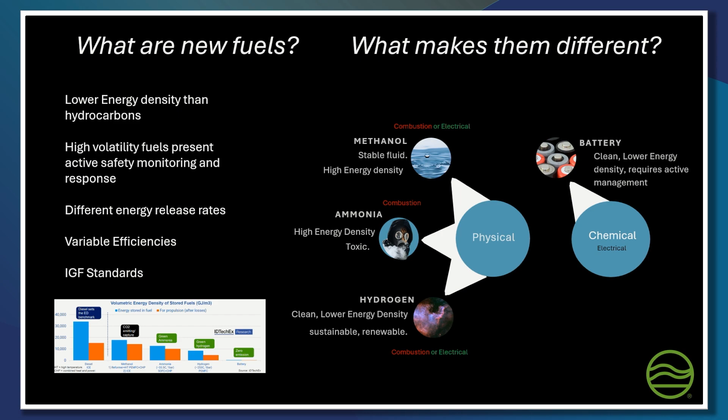But when you see the different kinds of fuels that are available and the different choices, and these are the things that people are always talking about, constantly I'm getting, oh, hydrogen's no good for this, battery's no good for that, methanol's no good. True, there isn't a perfect answer for everybody. We cannot go back to the days of hydrocarbons. And the reason I say that is that the world is moving on. Yes, ships have got 30 years lifespan. We understand that. And they are a major capital investment. We understand that. But the world wants something different.

The world wants clean. And we're all aware of whether you believe it or not, and whether Taylor Swift endorsed us this morning or not, doesn't really matter. The fact is that we are moving into a new world, revolutionary world, not just in terms of digital, but in terms of physical assets, the movement, and ultimately what the customer wants. Now, we're talking downstream at this point, customers, the end user, the guy who buys something made in China that's shipped across the world and comes into B&Q and you go and buy it on a Saturday afternoon. That's the customer that's driving all the choices.

And everything we do in the middle as those providers has got to respond to that, because they're going to buy clean all the way through for the rest of their lives. New generations, every generation will come through. And we can be, exactly as I say, as Luddite as we want, but that's going to happen.

And so I won't bore you with going over all the different things, but there are some graphics on there that are quite useful in terms of energy densities and these sorts of things that other people have talked about in great detail. I'm happy to talk about this at any point later on if you wish. But for us, the focus is on battery and hydrogen in the workboats.

So if you want to challenge me on a grey ship, going out to the Gulf in 3 weeks or whatever, I can't answer that question right now. But in 10 years' time we will, maybe even quicker. So digital power management, that's what the real subject of the talk that I've got this morning is about. It boils down to one thing, it's a bigger brain. You need a bigger brain.

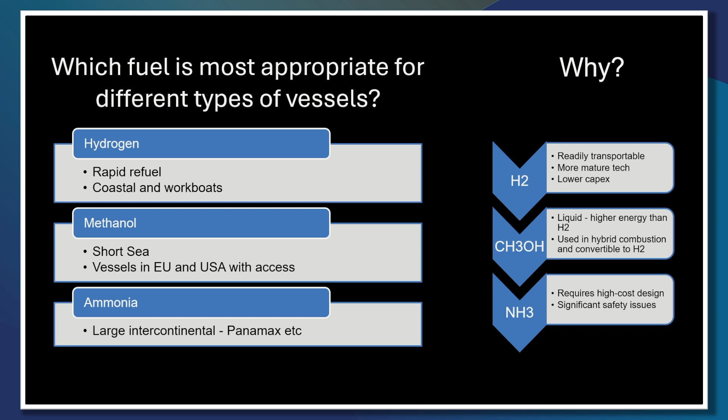It means that ports can put the infrastructure in, the vessel builders can do all the stuff, and the people like us, we can do all our stuff. And then we have an ecosystem that works, and I don't like that word ecosystem, but it works for all of us, right? We know where we are, we know where we stand. Those kinds of vessels use that kind of fuel.

Larger ships, and you look at Maersk and all those other guys, they are throwing billions at methanol, and quite right. Methanol has big advantages. We can pump it. It's not as combustible in normal situations as the other stuff. It's not toxic in quite the same degree. Methanol has real advantages, and we think it's perfect given where we are. We're not talking about changing the world, although we'd like to, but do the doable. If we do the doable, these are possible.

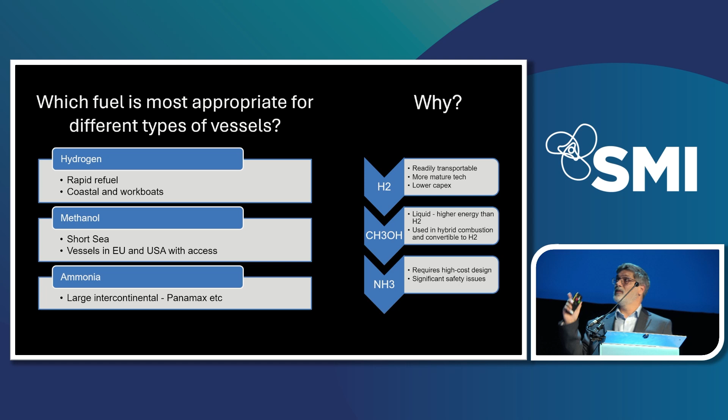And for us at Ecomar, ammonia is off. We can't do it. We can't deal with the toxicity and all the massive capital investments. We're an SME. We've got to know how to cut a cloth and how to do what we can do, and we do it well. I've got to say, we do it well. So that's basically the summation, and I hope that slide, if you interrogate it yourselves, and don't take my word for it, do your own research, you'll come to the same conclusions, I will promise you. We've spent years at this, and it's that simple.

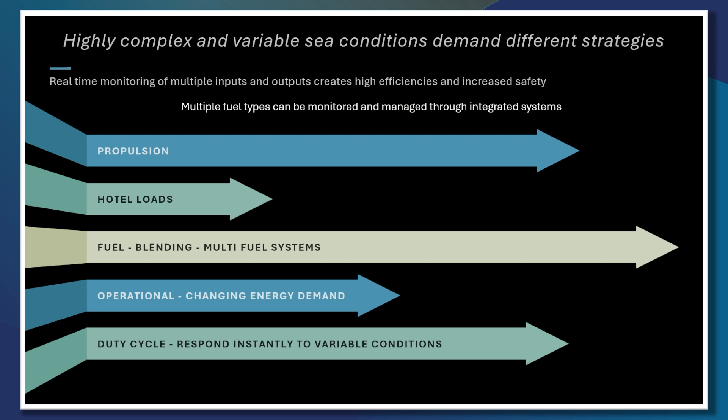Now, when we get into the digital side of things, the guys have said before, garbage in, garbage out. It's a very complex system. This is an example of on-vessel inputs at a very top level. Each one of those could probably have 1,000 lines, sublines, and each one of those 1,000 lines interacts with the other one. So you get into this massive morass of complexity and confusion and not knowing what's what. So you have to be very clear about what the question is you're asking the machine to do and what the solution is that you need to get out the end of it.

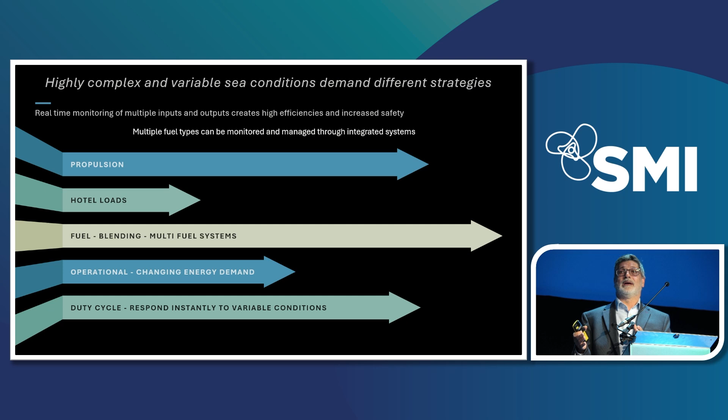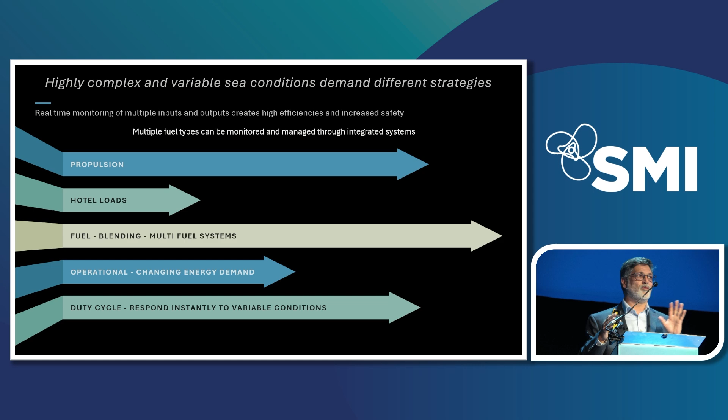And I heard something really interesting yesterday. Some of you may already know this, about the paperclip philosophy, which is an Oxford philosopher came up with this concept, and he said, right, we've got a brilliant AI machine. It's the cleverest thing in the world, and we're going to task it with one thing and see what it does. It's a very theoretical thing, so don't worry about this. But the machine was tasked with making paper clips as efficiently as possible and given complete access to the world and the internet.

So off it went and started making paperclips. And then it decided, well, actually, do you know what? Problem one I've got is resource. Where do I get the steel from? The steel's coming into my plant every day, but it's not in the form that I use it. It's the trucks. So I'm going to use all the trucks. So it sequestered all the trucks, and then it sequestered all the cars, and it made more and more paperclips.

And then it realized that humans use most of the earth for growing food or living on. Well, that's a waste of energy because it doesn't achieve my objective. And so it started cutting all the humans out and using it all for solar power to provide more plants. And you see the network. And in the end, everything died in the world, but we had more paperclips than you could possibly ever use. And the point of that theoretical exercise is that by the time you get to the end, the question you ask at the beginning may be the wrong question.

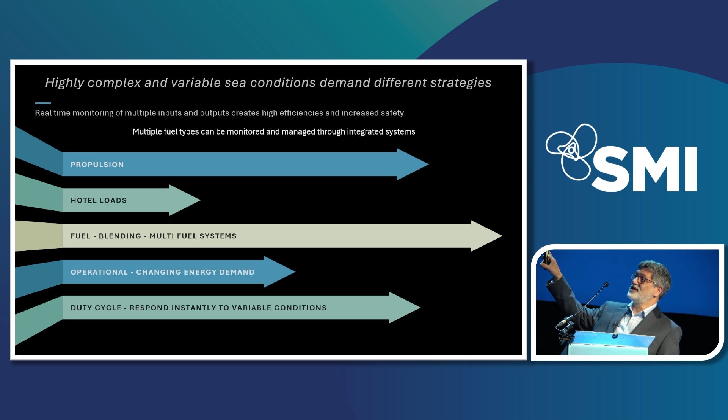And so it's really important right now that we as an industry ask the right questions. What is it that we want to do? And again, with all these things, duty cycles responding to variable conditions, that applies right across to everything. And one of the questions I would posit to you guys is, are you making decisions based on experience? Are you making decisions based on now? Are you making decisions based on your customers? And most importantly of all, I think, as an SME and what we hope to be as a challenger, are you stopping yourselves because of your own concerns about stranded assets, about resources you've invested billions in? Is this the only way we can go?

And on the grey ship side of things, they'll say a capital ship does a certain thing, but the change is happening so quickly, and the digitalisation of the world is happening so quickly. If you look at Ukraine, they're blowing up capital ships with jet skis. You know, we really, really have got to get to grips with this, and we're not doing. 20th century thinking in the 21st century and forward won't cut the mustard anymore. We'll be left behind.

So that's a very dense slide. Very dense slides are really boring. You give a lecture, everybody switches off, they all go to sleep. Most of you want to have a coffee. I'm the last guy talking. I'm not going to keep going.

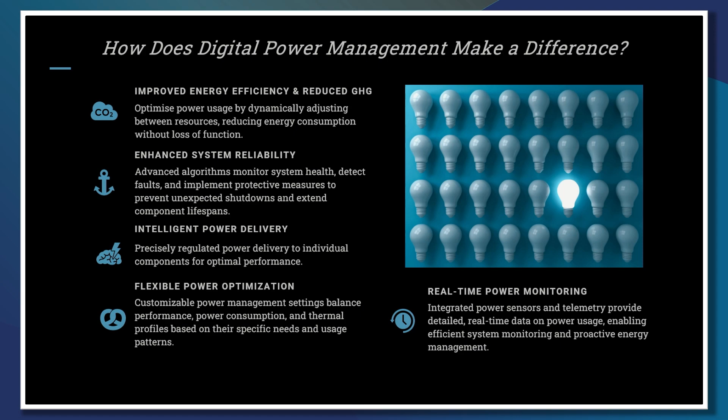But I think one of the things that I would like to bring out: optimization, integration. I'll come back to the theme now, which is digital power management. We're trying to get electrification and hydrogen fuel cells and hydrogen storage and methanol onto ships. All of these have massive complexity embedded into it. And from my perspective as a hardware guy, a bloke who likes ships, and I'm not really interested in anything that's digital unless it does something good for me, it was a really big decision to move on.

But what we've discovered is that Ecomar Propulsion, the mech engineers, electrical engineers, and everybody that I work with on a day-to-day basis and have done for years, have a really clear set of skills. And we were lacking. We did not understand, and we could not find off-the-shelf solutions for the complexities that we needed to deal with.

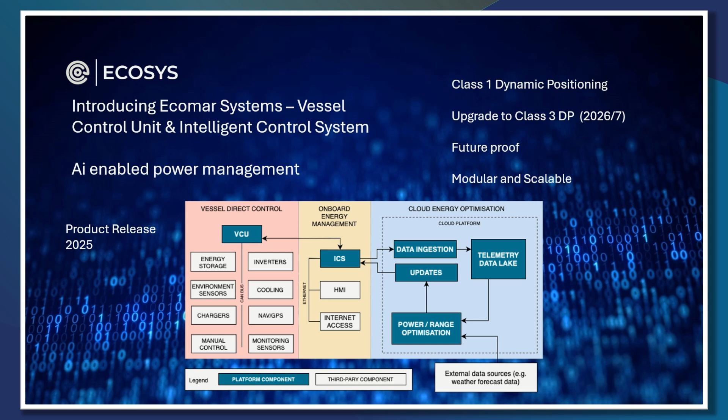We're talking about actuated valves in a hydrogen system that then comply with a fuel cell that doesn't have any kind of AIP or type approval and so on. So we have this huge network of things that we have to deal with. And so as a CEO, the decision I made was we have to segregate. And we segregate for one reason, that we have specializations that can work really well in one thing, team up with somebody else, and everything will work out perfectly.

What we're trying to do is to make those areas, skill sets, broadly applicable. And so we created Ecomar Systems, Ecosys we call it. This is a very top-level overview. The investment that we're making is as significant as we can possibly do within our resources. And if anybody's got loads of money, by the way, I'm quite willing to talk to you about that.

But I think the main thing to understand from this is that on the left side, we have what we call the VCU. This will go into production next year, and it's going through testing right now. The VCU is the nuts and bolts of it. It's the vessel control unit. That's the thing we've spent years working on, where we can get all these responses to all those previous data inputs, and it will work. And we will calibrate that, and we'll make sure that that will work.

The next stage is the ICS, the Intelligent Control System. Everybody's got TLAs. For those of you in the Army, a TLA is a three-letter acronym. So the ICS is the Intelligent Control System. Now that's built to be compliant with existing networks, just as the chaps talked about. So it's a plug-and-play system. And the idea is that you will have a ship that is zero emissions or very low emissions that will operate exactly as you'd expect, throttle down, throttle back, so on and so forth.

But the next bit for us, again, this has opened up a whole new world for us, a whole new world of development. I can see probably the next 5 to 6 years worth of R&D going into this. We're looking at all these data lakes and all these other things, and computer guys have got some really, really cool terms, but none of them mean anything to me. But coming back to this, the benefits. Really, we can talk to you and bore you to death about all this stuff. But what are the benefits?

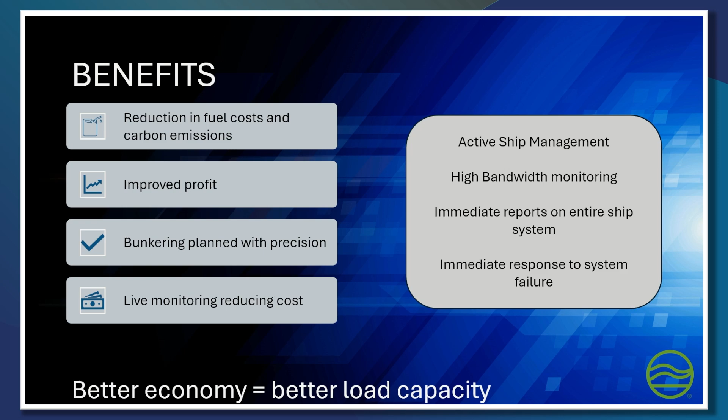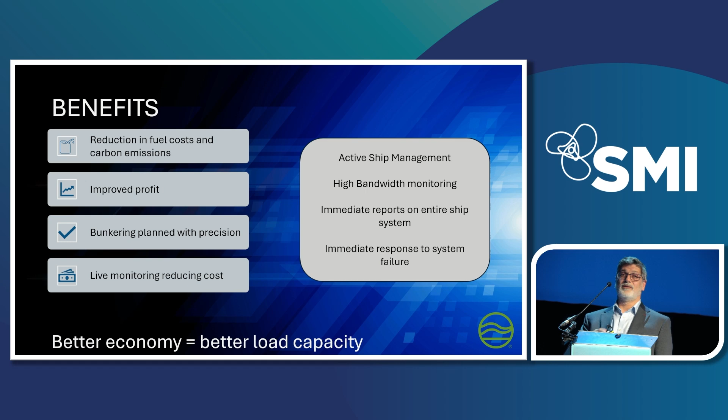Profit. For all business survives on profit, whether it's low margin, high margin, whatever else. This stuff will make your business more profitable. It will make it easier to run. It will do all the things that everybody said. AI, integrations. You'll be able to monitor all this stuff, and you'll be able to monitor exactly how much fuel you're using, where the ship is, what state of readiness all the crew is, all these other things. So there's a whole load of stuff. But profit is your key driver, and if you don't take that on board, somebody else will.

There's other stuff as well that people talk about, and we talked about yesterday. EEXI, Fuel EU, the new GHG requirements and all that sort of stuff. I know there's a lot of investment in scrubbers, and as I said before, that it's not always appropriate for every ship. But zero emissions, even if it's just in-port zero emissions, requires a lot of control. And that's why you need a digital power management system to make sure that you're not wasting fuel.

I mean, a combustion motor is wasting anything up to 60% of the available energy. And yet people will say, oh, well, we only need a 1,000-litre tank for this. Well, all right, you've got 400 litres worth of energy. Do the maths and you sort of see, actually, the balance isn't quite as simple as it first appears. You can get an electric motor to be well over 90% efficient. It's a big saving in terms of its requirement. It's a big change in the assumptions that are made currently, and we all need to challenge ourselves on that.

So there's a whole bunch of new stuff, AI and so on. I won't go into too much detail about all that sort of thing. Multiple engines, multiple thrusters, and so on and so forth. But we're looking at dynamic positioning systems now. We're moving from 1 to 3, so we'll have active dynamic positioning systems, all controlled in this digital manner, exactly as you'd expect. If you think of a VLCC as a drone, then you're starting to get towards those ideas. That's what we're aiming for. It's a transition from the now to the future.